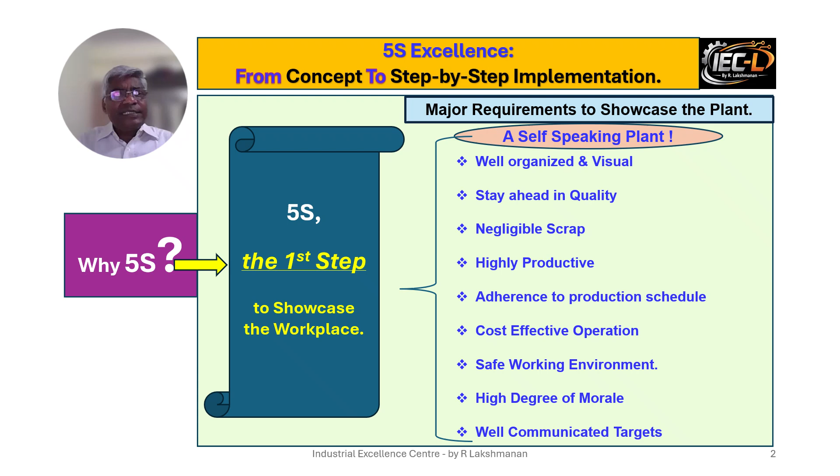Is that the only benefit we get out of 5S? There are much more. Let's see in the next slide.

For us to excel in manufacturing, we need to implement one of the manufacturing excellence practices. It can be TPM, it can be lean manufacturing, it can be WCM or whatever. For any of these things, the very basic requirement, the fundamental requirement, the gateway, is 5S.

Not only that, if you implement 5S, the plant will become more visual. It will have a safe environment. The plant will be very neat. It creates a competitive culture among the people. And also, most importantly, it will be self-motivating for the employees working in that organization.

It reduces financial losses. It surfaces all kinds of losses for us, and therefore we can take action. In a nutshell, 5S cleans up the entire organization. These are the benefits we get out of 5S.

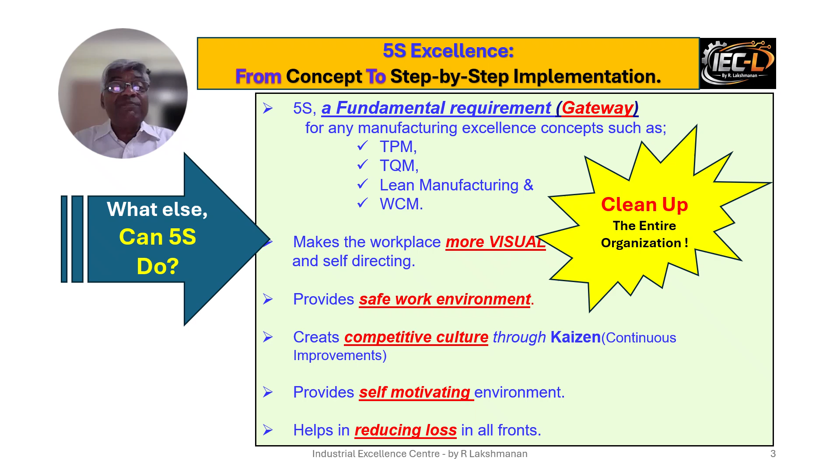Now let's see what 5S is. 5S simply means there are 5 Japanese words starting with the letter S. What are they? Seiri, Seiton, Seiso, Seiketsu, Shitsuke. In English: sort, set in order, shine, standardize, and sustain.

First, sort. By default, we would have accumulated a lot of unwanted materials in our workshop. We need to get rid of them. Segregate and remove all unwanted materials - that is 1S. Red tags and a red tag area are used for this purpose.

Having done this, we need to maintain the good, usable material properly. So we need to arrange them and identify them. Arrange and identify - that is 2S. A place for everything, everything in its place is the Taraka mantra of 2S. In fact, 2S is the heart of the entire 5S.

Now let's go to 3S. Now we are having only good, usable material with us. We need to maintain them, then only we can have good quality - it should not get deteriorated. Therefore, we do cleaning in 3S, and that is 3S.

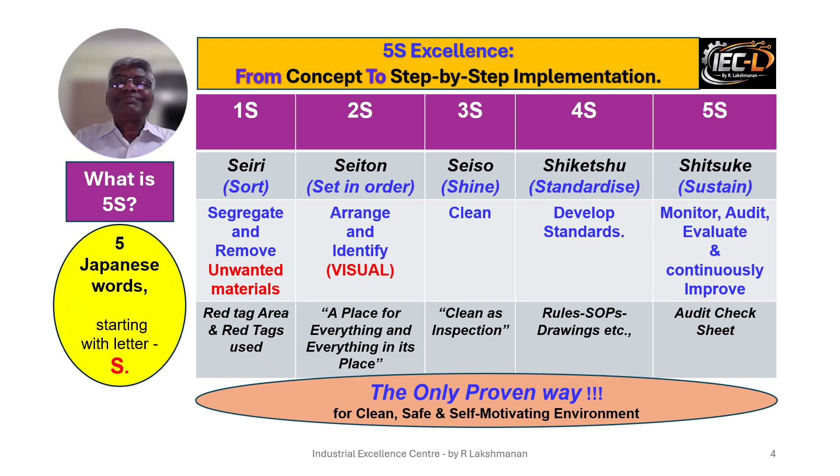From now on, let's see how to implement 5S. For convenience, I have divided implementation steps into 9 steps. The first 5 steps speak about our preparatory and planning activities. The subsequent 4 steps speak about actual implementation.

Planning done in advance reduces implementation time by 9 times - this is the saying. Therefore, planning is very important. Okay, now let's start seeing planning.

Step 1, what should we do first? The very first step is to train each and every employee from top to bottom on 5S principles. Try to show as many visuals as possible. Show them a lot of live examples. Very important - communicate 5S benefits to everybody.

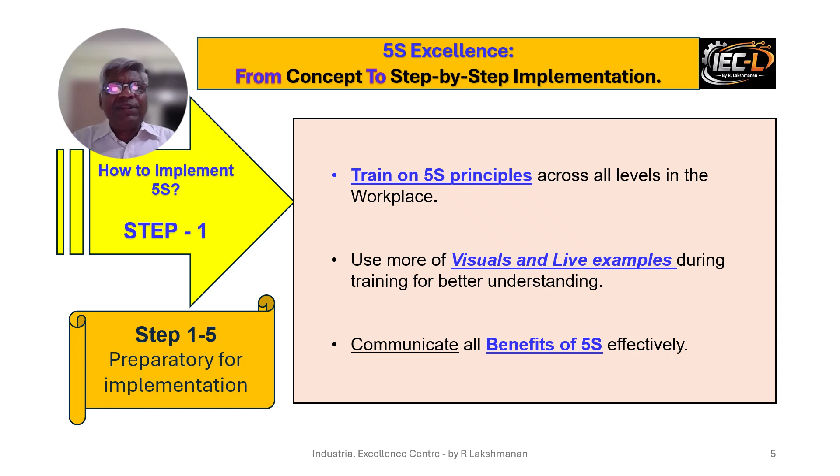Communication is very important. Without people understanding the benefits of 5S, they will not be able to buy into the idea of implementation. Therefore, in this step, we have to spend quite a good amount of time to train everybody so that they are with us for implementation. In step 2, it is important to select a champion for 5S, the coordinator, the leader.

He facilitates the entire implementation process for the company. How should a 5S champion be selected? He should have basic knowledge of 5S, or at least be open enough to acquire that knowledge. He should be an active person. Most importantly, he should have a commensurate leadership position. We all know that in a powerless position, people are not going to trust him or follow him. This is what happens in practice. Therefore, it is necessary to select a person with proper leadership skill and positional skill.

Most importantly, positional skill, if we have to implement 5S successfully. Sometimes we may feel we may not be able to relieve such a person for this role. It is always done by giving some able assistance to him, so that he will be able to manage. But most important is to select a person who is enthusiastic and also has positional skill, positional leadership power. Most important.

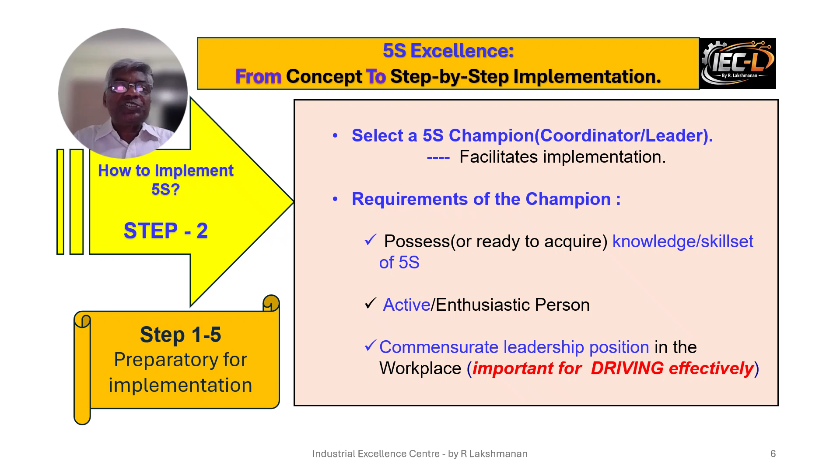In previous steps, we have given training and also selected a good able hand, a leader for 5S implementation. Having done this, now it's time to divide the entire organization, including canteen, periphery, etc., into small multiple zones. Avoid large size zones. Sometimes similar operation, similar machines may have a very large area. It may be difficult for us to avoid large zones. In such a case, have subzones. One large zone, under that have multiple subzones. Ultimately, it is necessary to have at most a medium size zone for effective implementation.

If the zone size is large, we will not be able to implement effectively. It will be a substandard, suboptimal implementation only. Therefore, try to have as many zones as possible. Normally, a small size plant will have anywhere between 30 to 40 zones. Just for information, if it is a larger plant with multiple zones, it can be in hundreds. Therefore, be careful and give enough thought process in dividing the entire plant into multiple zones.

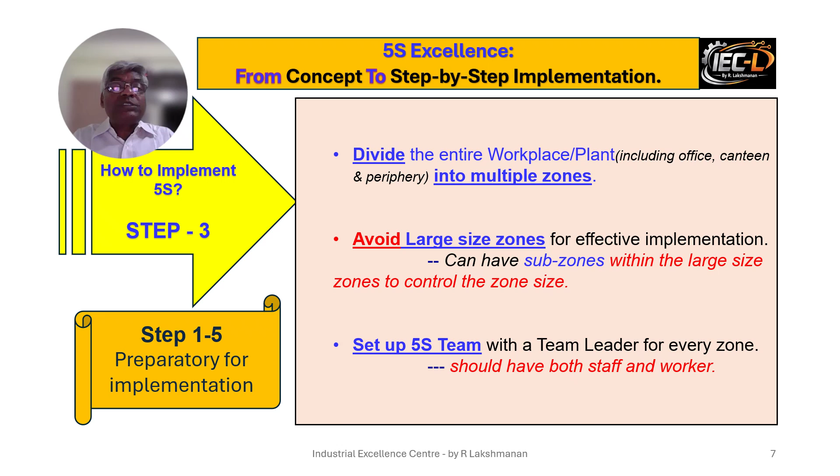Every zone should now have a 5S team. This team should be a mixture of workers, that is operators, as well as staff category people. Normally, a 5-member team is a good team for this. Suppose there are 50 zones, so we will have 50 5S teams and 50 5S team leaders also. It is important to have medium size zones, multiple zones, with all leaders.

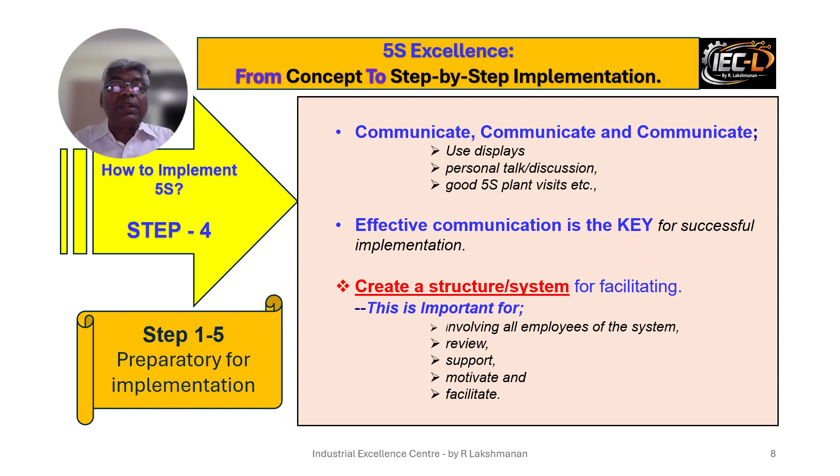In this step, we improve our communication. Communication is the key for success. Thereafter, create a structure. This structure will help us review 5S progress, support people, facilitate people, motivate people, and this has to stay forever in the organization.

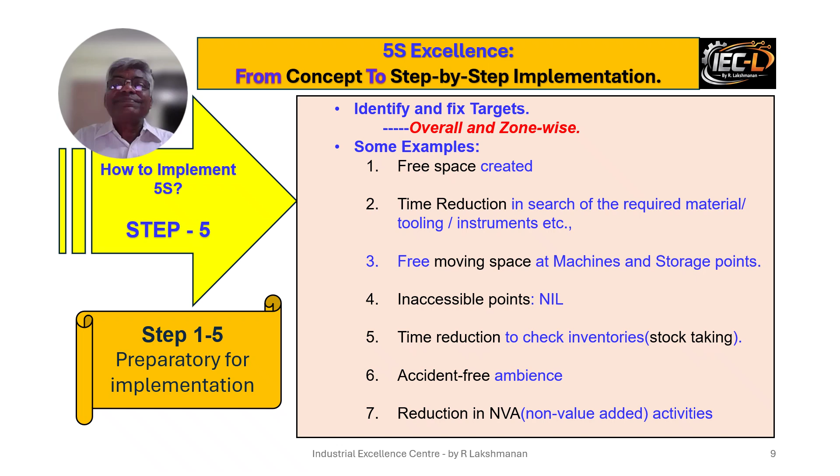Now let us see how to implement 1S. If the organization is a big organization, large organization, it may be difficult for us to take up all in one stage. So normally we select pilot zones, 4 or 5 pilot zones you can select and start with that. If the plant size is small, you can take it up in one stage, no issue.

Now coming to 1S implementation, we have to remove all unwanted materials. So for every zone, identify a designated location. The team there should keep on removing all unwanted materials and put them into that zone, into that bin or designated location. Keep on disposing of it very frequently, quickly. At the end of it, you would have removed all unwanted materials. You will have very little in quantity.

That is the time you set up a red tag area. Some of the material you may not be able to remove immediately, so use red tags for that and have a strict follow-up. Have a log system to follow up on all these things. Keep on removing all unwanted material on a daily basis.

Now, at this time, have interzonal audits to make this system more effective. Zone A can go and audit B, B can go and audit C, etc. Like that, you have interzonal audits. Finally, the 5S champion should audit. Also, the plant head should audit. This will help us involve everybody, and also make the system foolproof. This is how we implement 1S.

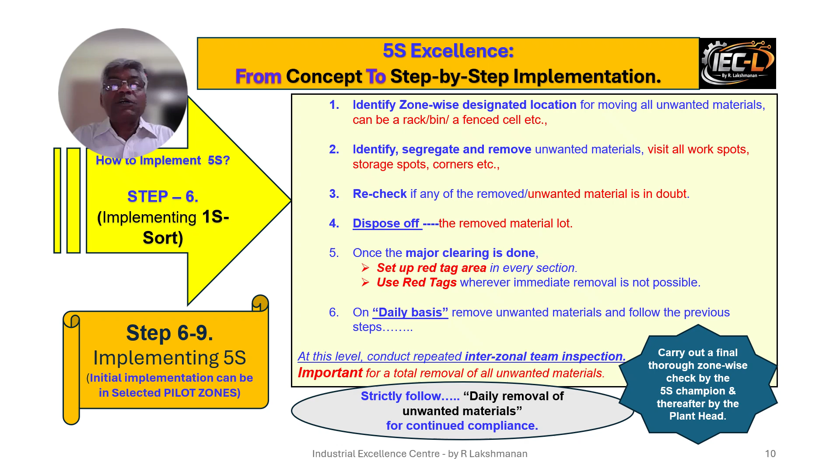Now let us see how to implement 2S, the most important step of 5S. To implement this successfully, set up your own guidelines initially. They are not standards, but they can become standards in future.

Examples can be no materials on the floor, a designated location for every material. All materials are in racks, bins or trolleys only. No mix of materials, aisles are marked, etc. Like that, you have some guidelines and follow all these guidelines strictly.

Take action. Once you fulfill these guidelines, you will have good 2S implemented. During this step, we will have a lot of improvements we'll be doing. These improvements are called kaizens, small improvements. And to maintain that, we also make small OPLs, one-point lessons. Let us see more details about this later on.

As usual, in this step also, at the end of this step, carry out all audits like champion audit, plant head audit. You carry out all these audits and then only pass 2S.

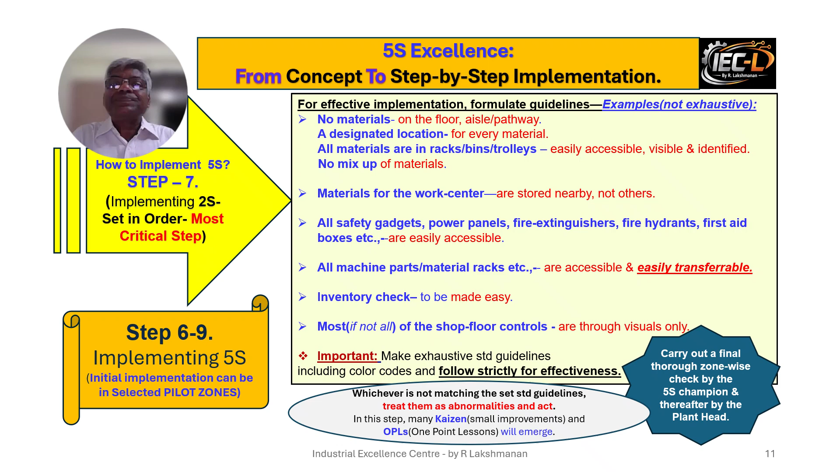As a part of 2S, we are just showing you here materials: if stored on ground, what will happen? If stored on rack, what will happen? Material stored on ground will be mixed up with all material. You may not be able to retrieve it when it is required. It will also get deformed. It will also attract dirt. Whereas in a rack, all these problems are eliminated.

Generally, the storage system will vary from company to company, industry to industry, section to section. So we need to work quickly on this. This 2S will bring you all these kinds of benefits. Only this 5S team can bring out all these improvements. We just have to motivate them.

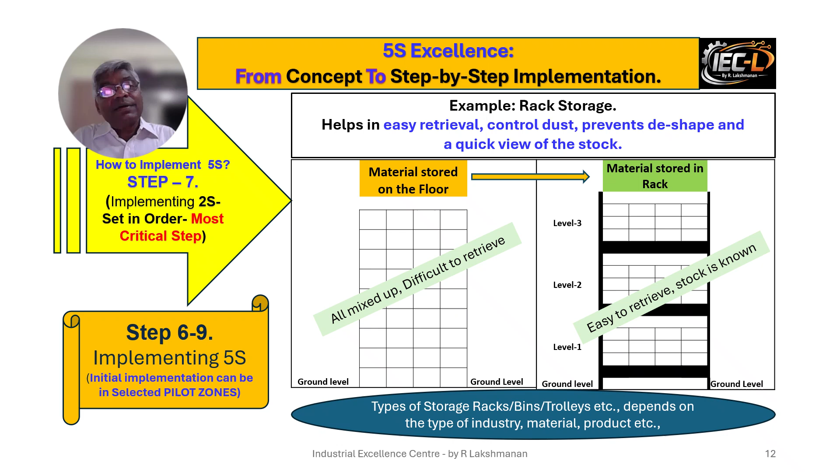Now let us see how to implement 3S. In 3S, we undertake cleaning of all components, machines, racks, roofs, corners, floors, everything. The ambience will have to be kept very clean. As we clean, we also inspect.

We find lot of abnormal situations, and these aspects will come for corrections. During these corrections, we start making lot of kaizens. To maintain that, we develop lot of OPLs. So lot of improvement will take place during this process. My personal experience in one of the factories, during this step, we found a major hazard and we could prevent it in this step. This is my personal experience.

So now once you implement this, you have to maintain it. So how to maintain this? We implement a popularly known check schedule, inspection schedule. It is called the SEISO calendar. That is, every machine part, rack, all those things - how to clean, when to clean, what is the frequency of it, who will do the cleaning. Covering all these things, there will be an inspection calendar, and this calendar has to be followed very, very strictly. As usual, like 2S, here also we conduct audit.

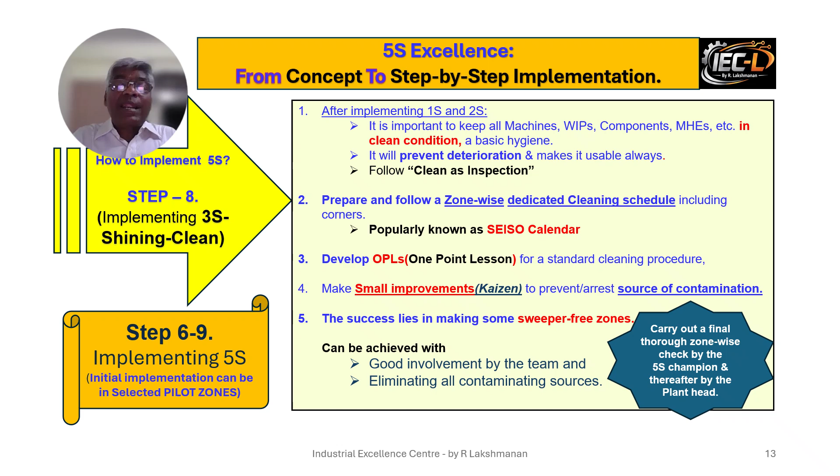Here we see how to make OPLs. OPLs cannot be in paragraphs. It should have maximum 5, 6 words only, not more than that. It should be pictorial. As we walk, we should be able to read. Nobody is going to stand and read.

If you are not following these things, then the OPLs will stay there as a monument. Nobody is going to read that. It will not be effective at all. Therefore, make it pictorial just with 5, 6 words, and we should be able to read as we walk through. The best example could be the signal system, what we see on our roads.

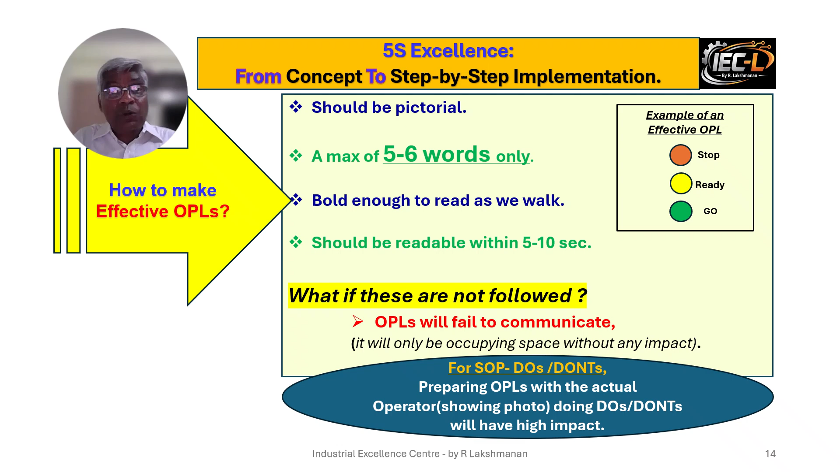Now let us see how to implement 4S and 5S. In 4S, for all the first S, second S, 3S, for each and every activity, develop standards. It can be a rack - rack means you can have a drawing, for example. Like that, you have standards. It can be an SOP, whatever. You develop the standards.

Against these standards, audit 1S, 2S, and 3S. You will have a lot of gaps. Keep on bridging the gaps. This is done through a check sheet, and that is 5S. 4S and 5S cannot be separated out of 1S, 2S, 3S. Though 1S, 2S, 3S are the real implementation, 4S and 5S are very important to sustain.

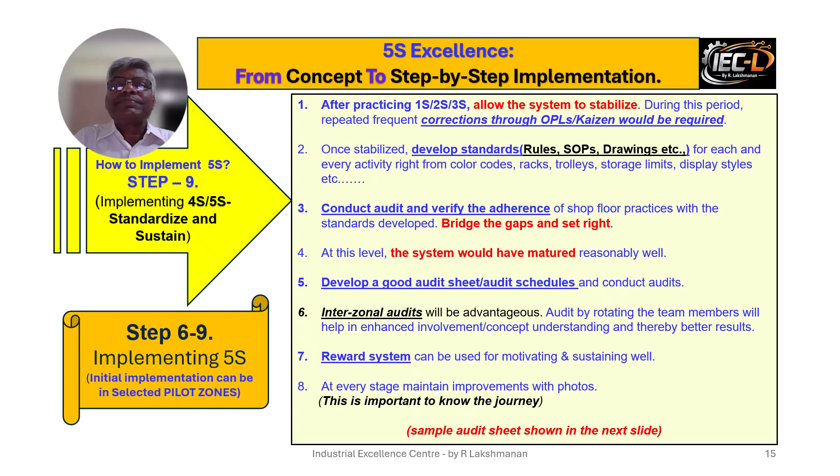Once this 5S is implemented, the regular audits and review through the structure we mentioned earlier - most important, keep motivating. Interzonal audits and check sheet audits are very, very, very important, and review at least once a month involving the plant head. Keep motivating people, recognize them, because 5S is not a project, it's not a one-time project, but it is a habit. It should be continued forever to get its full benefit.

5S, as we already said, is the only proven way to have a more safe work environment, and it is the gateway for all the new manufacturing excellence practices. And therefore, let us not just implement 5S, let us live it every day. Thanks, for any questions you can contact.